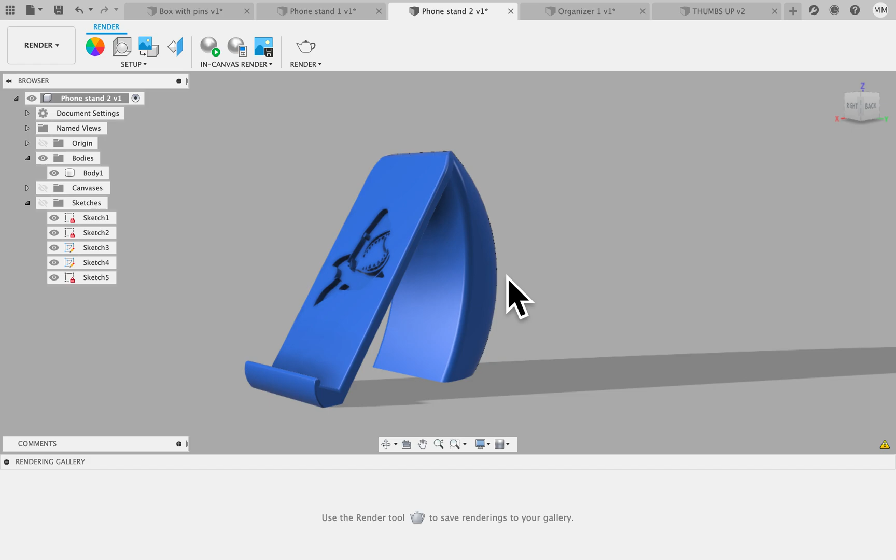Welcome to a tutorial on how to make a simple cell phone or mobile phone holder. I'm just going to go through the steps on how to create it, and you can follow these steps to create something similar, but with a different shape if you want.

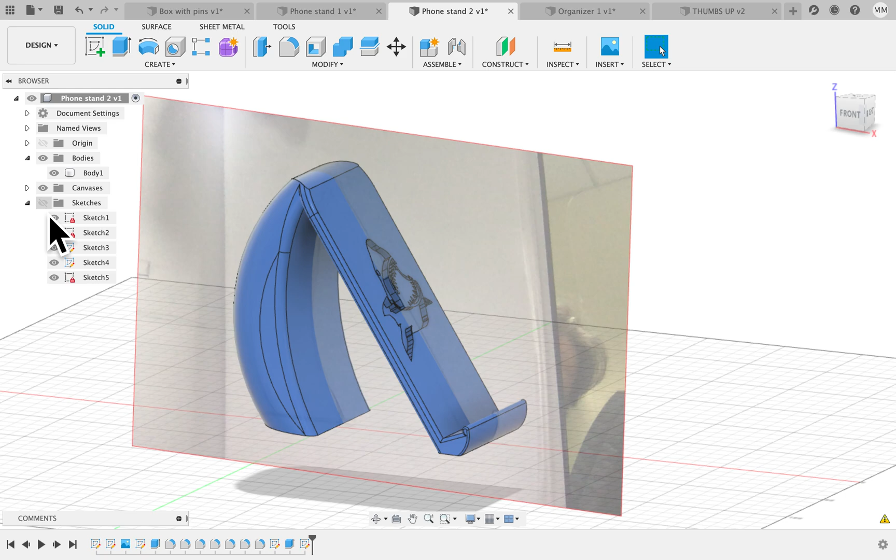I'm going to go back to the design menu and turn on my canvases and all my sketches so you can see this is just one body. There's a canvas, which is the drawing I brought into Fusion 360, and then I have a couple of sketches. I'll back up to the beginning. First thing is I turned on my origin.

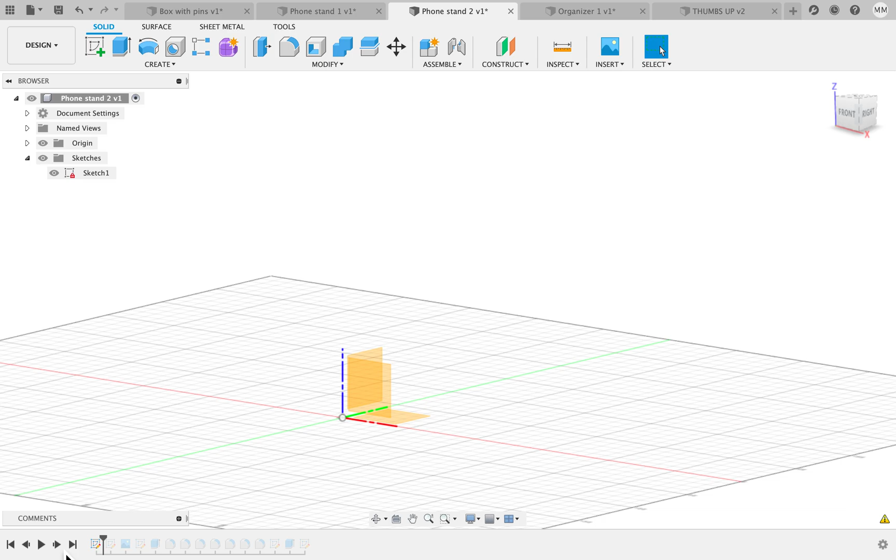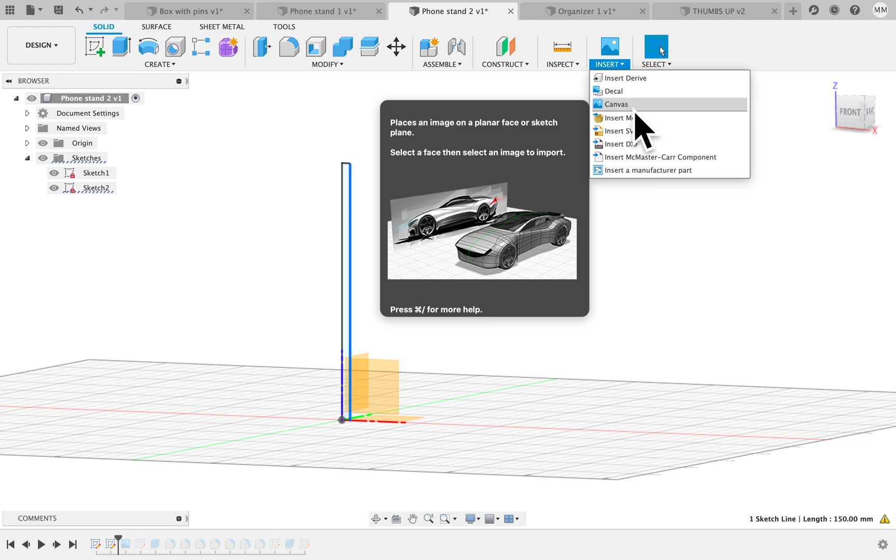Then I created a rectangle on this plane. The reason was I needed to make sure I knew the size of the product, and I measured it in my sketch as 150 millimeters, or 15 centimeters, so that when I inserted the canvas and said insert from my computer, I found the right photo. Nope, that's not it.

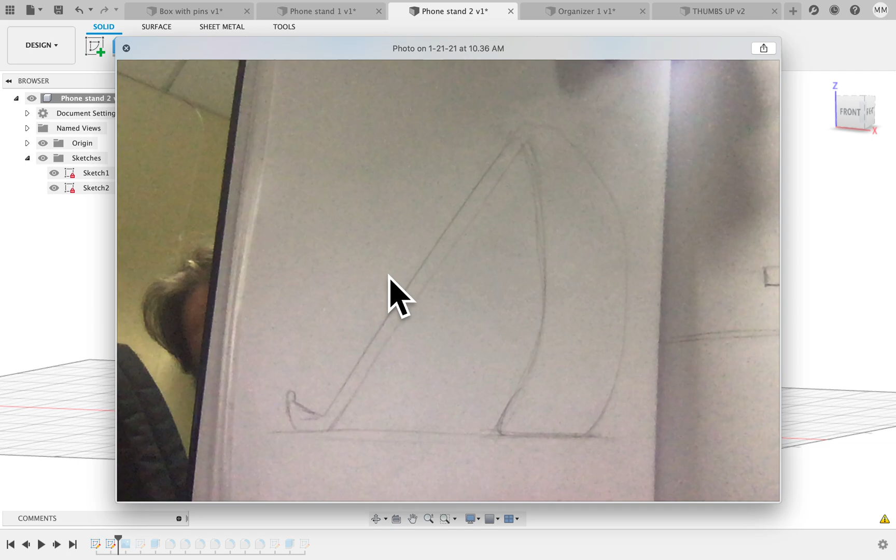There it is, that's the photo. I used my cell phone measurements so I knew exactly how large, and I knew about the angle that I wanted it at. I imported this, and when you import it, it asks where you want to put it, where do you want to put that canvas. I clicked it here. Now it's going to come in small and you'll have to scale it up.

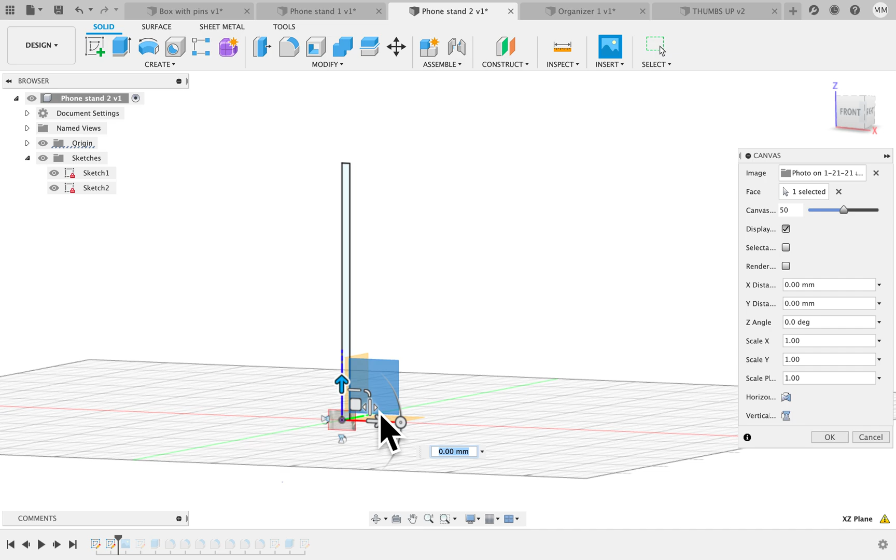You've got to get used to all of these, the same move copy tools you get. You can rotate it, move it up and down, left and right, move it within the plane, which will come in handy. But this little corner, you pull on it and you make it bigger. You can scale it up, and then you want to move it.

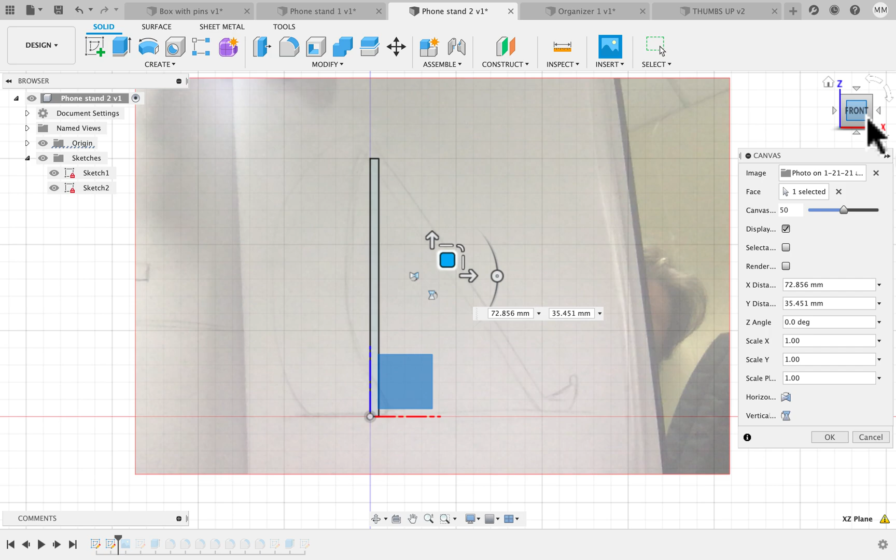What helps is actually to look at the front, so click this so you're looking directly at the front. What I want to do is make sure the bottom of the cell phone stand is kind of on this red line. We're going to fix that, it's a little off.

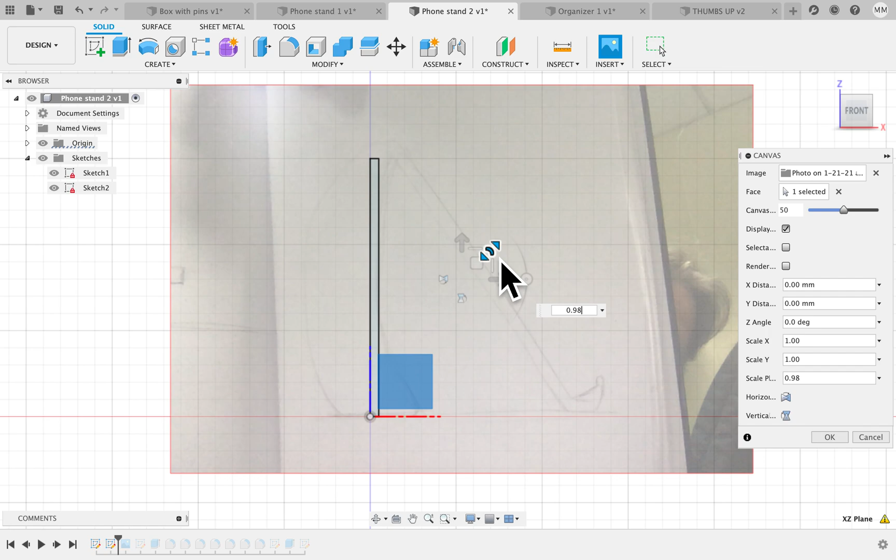Tilt it a little bit. Honestly, you should probably have a better sketch than this, a little more detailed. Here I've got the top of it. It's a little low, so a little smaller, so I'm going to scale it down, and then that is about right.

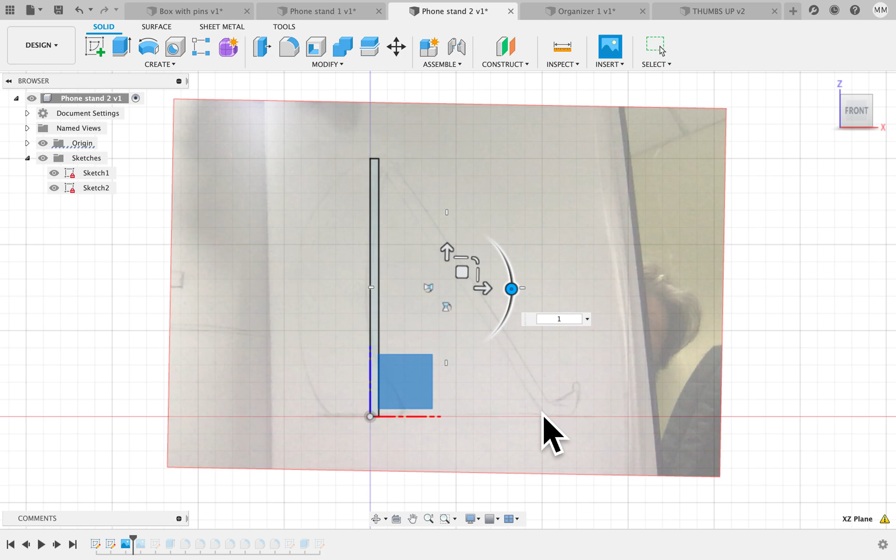I'm going to rotate it just a tad, minus one, one, that's about right, it's okay. We're just going to use the sketch as a template. You can make changes as you see fit.

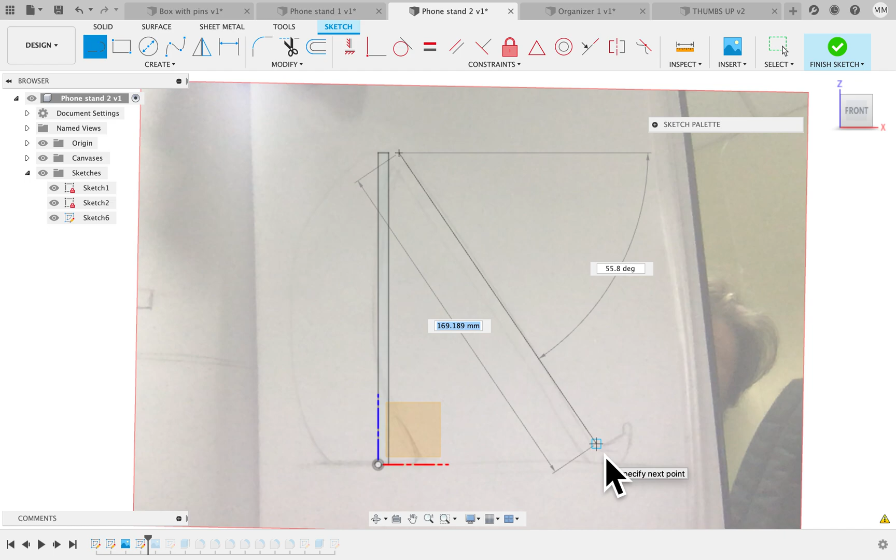The next thing we're going to do is click the sketch menu right here, and go into this sketch menu. Now I'm just going to use the sketch tools like line to create the lines I need. Press escape if you need to jump off the tool. I'm going to draw a line across the bottom because I definitely want that first for reference, and another line from about here.

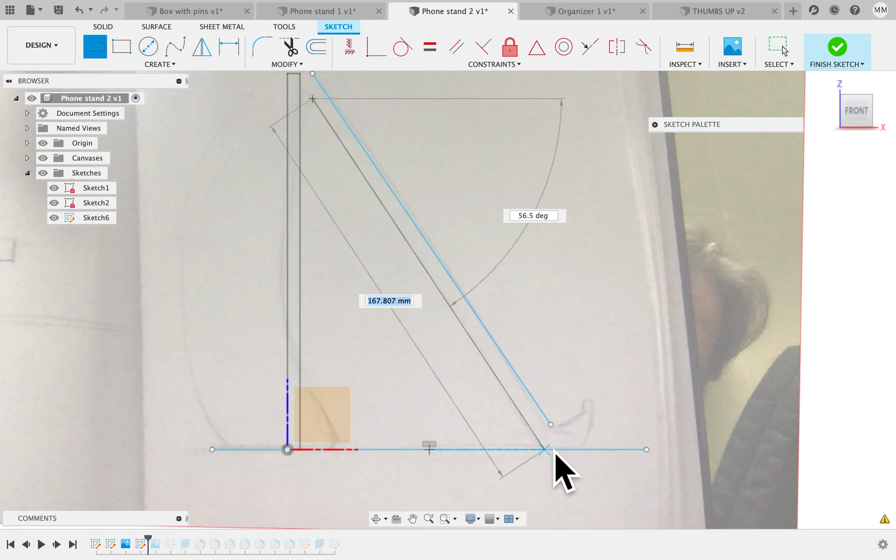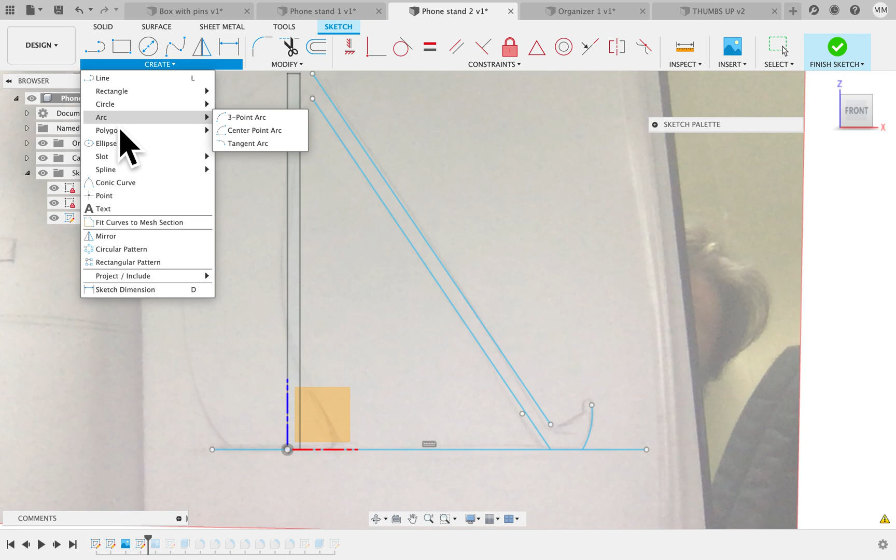The other tools I will use are arcs, 3-point arc, which I can click on one area, click on the top, and make the arc I want. Rectangles, circles, etc. There's a spline tool you can make complicated curves with, you just have to practice it a little. You can really get, just like the Illustrator pen tool, a lot of functionality. If you're making intersecting shapes and you stop it, you can always go to the trim button and trim off the parts you don't need.

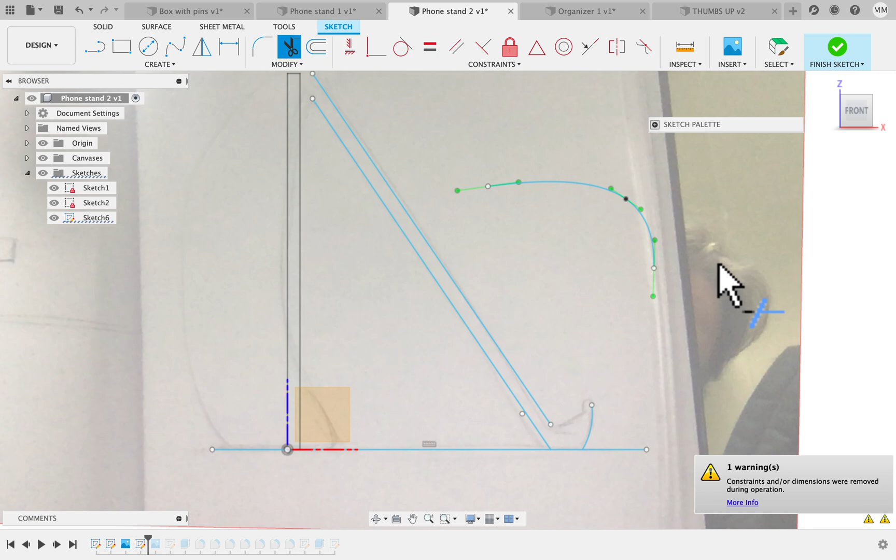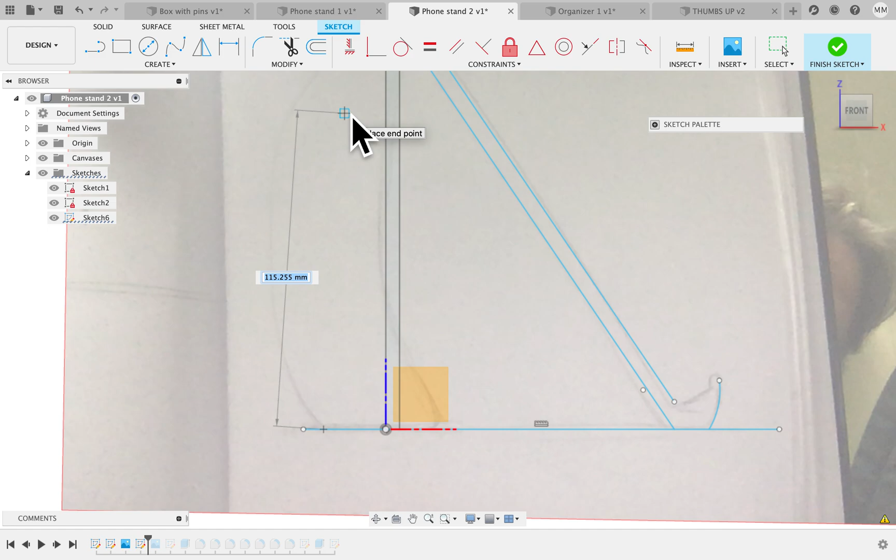Come back up, so just do one more arc from here to about here because it's the top, and then from here, let's see if I can make this arc work. From here to here, and you get the idea. When you're done, you should have something like this. Let me see if I can turn off that sketch.

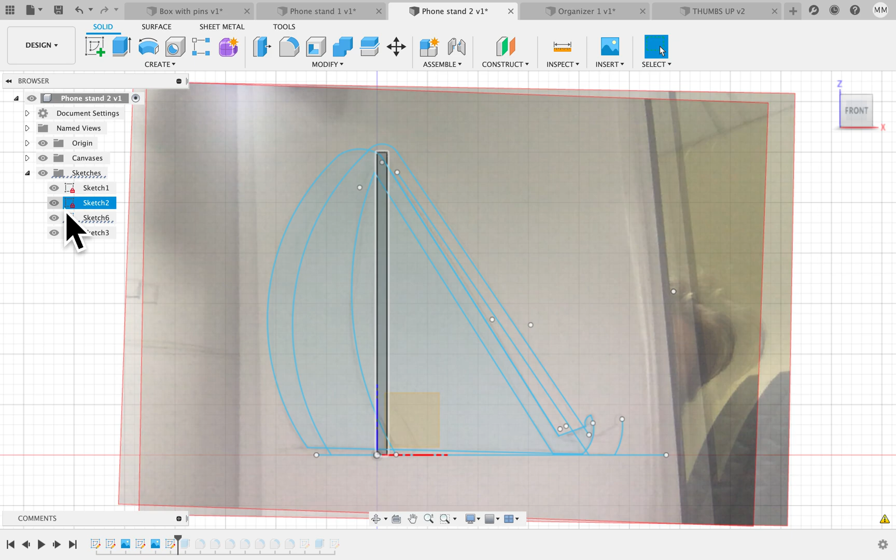I'm going to turn it off. This is the sketch I created. It is one full shape, and then I can extrude it just using the extrude tool. You can see I've extruded it. Let me push back.

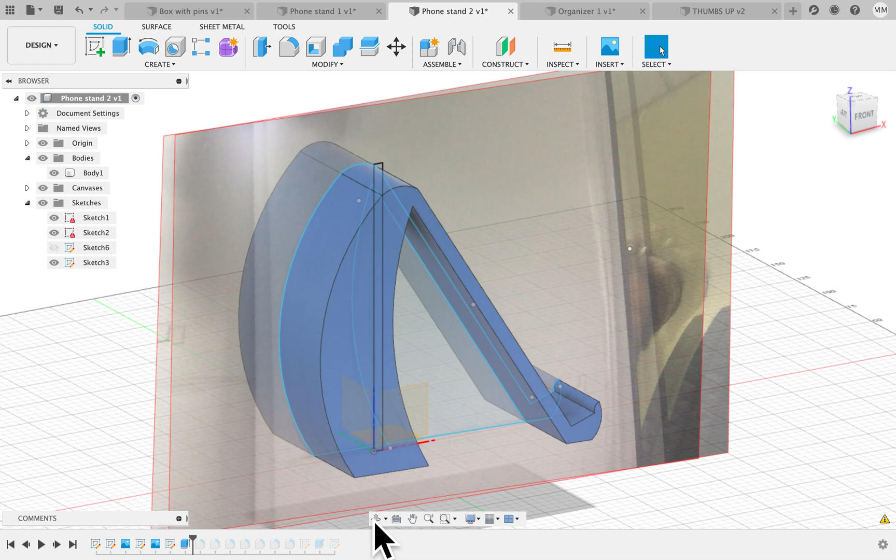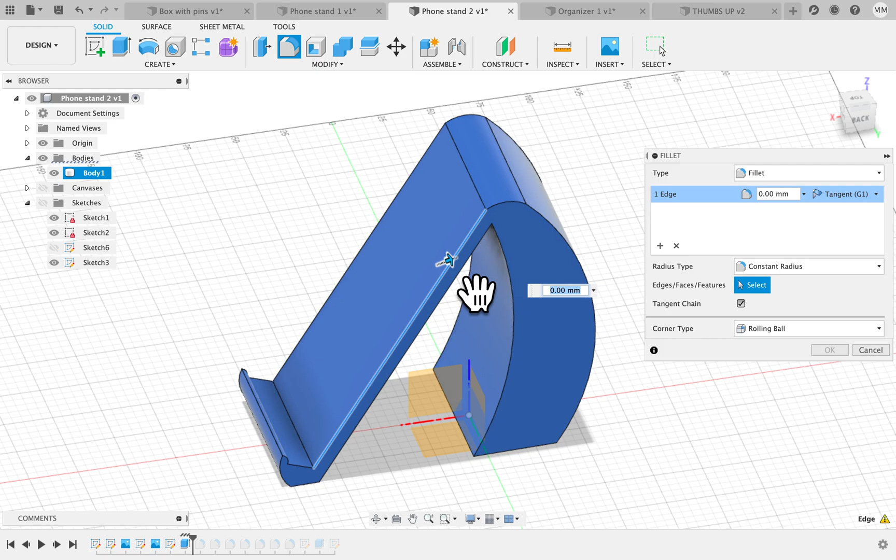Now that I don't need this sketch anymore, I'm going to turn the canvas off, and turn off my sketches, and I see that's the shape I have. Now I'm going to use the fillet tool and start filleting stuff. Let me show you what that does. You click on it, click on an edge, and when you click in, you can round it off. If you've done the other tutorials, you already know that.

So I'm just going to push through and show you, I did a fillet to the back, really made it round. And some of the corners, I want to take off all the sharp edges so it's not dangerous to put your cell phone onto the stand. The next thing I did

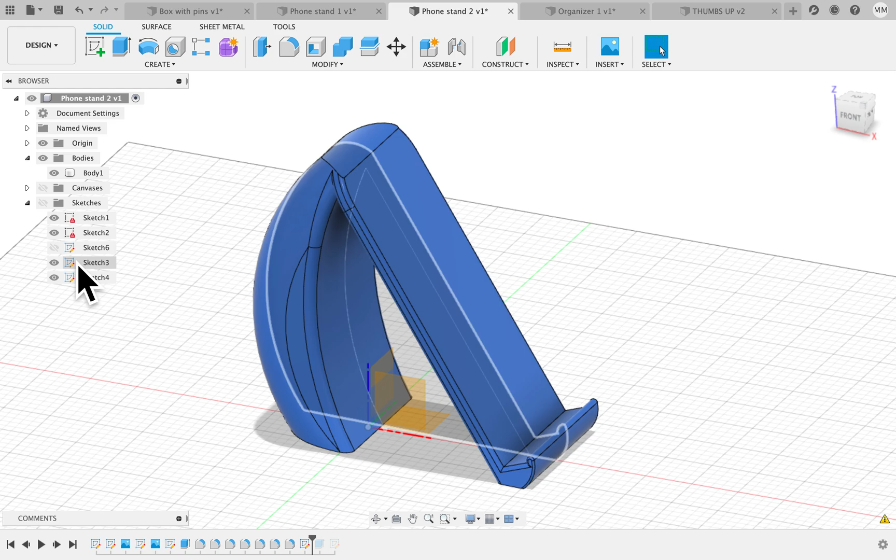was bring in an SVG of this shark. Through your practice with the logo project, you probably have been able to bring in or draw yourself. Create shark head black, let's see. Here we go, there's a shark head. It's very easy to do. I can even just copy this right in.

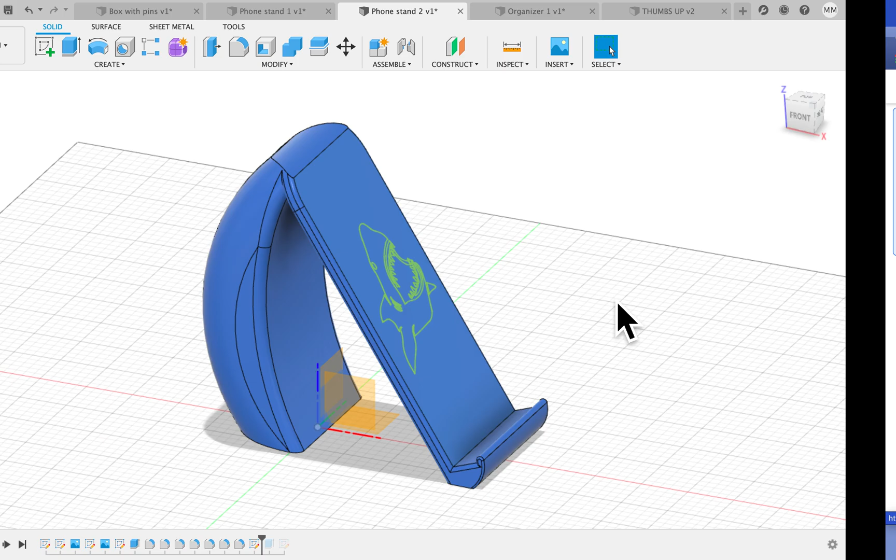For example, put that one over here, paste it in. Here it is, image trace, expand. Then we can unfill it, give it a stroke, delete anything you don't need. So these boxes around the edge can go.

Oops, I must have cut off the top of it. Okay, so I'm just going to back up. Make sure you get a good copy. If you draw it yourself, that's going to be a little more technical skill, so that's actually something you probably would want to try.

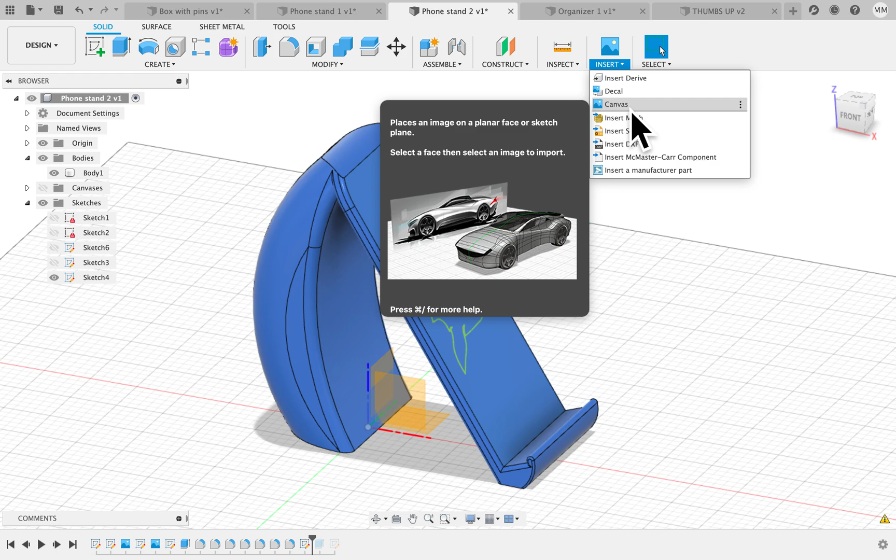You export this as an SVG. In the insert function, just like the canvas for the JPEG, there's an insert SVG. It asks you where you want to put it. I put it right here on this face, and then I extruded down and cut into the shape.

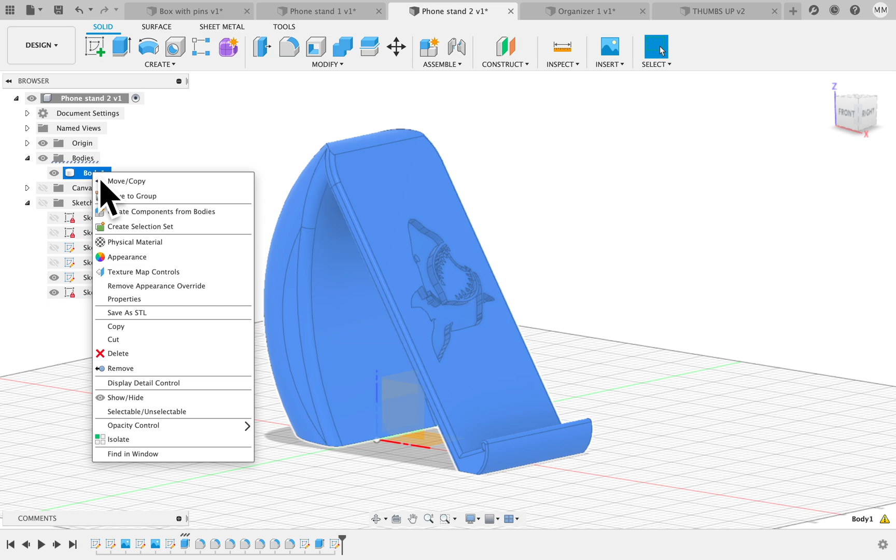And then you have the final product, and I only have one body, so I'm going to click on it, control click, and save as STL. Just say OK, it asks you to name it. Stand 1.2. Okay, and then we would go through the process of preparing the print for the 3D printer. Thank you.